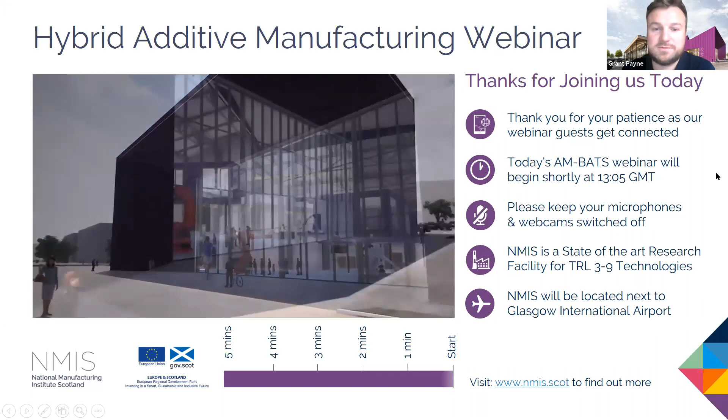We're running this one focusing on hybrid additive manufacturing. So we'll be finished up around about 3:15 Greenwich Mean Time today.

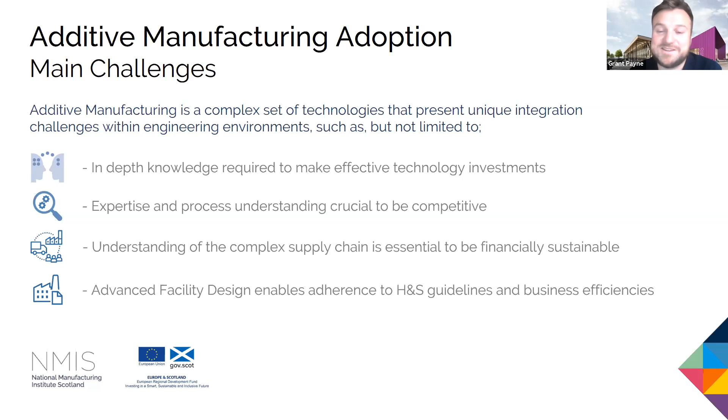We've been working in this area for a long time now, so we understand the complexity of the supply chain, and we'll be able to break this down and simplify it for you. Lastly, looking at the facility you would need to house additive manufacturing, the health and safety around this can be quite daunting. We've gone through it, we've got all our lessons learned, and hopefully we'll be able to transfer this across to you in a very efficient manner.

So essentially, what we're trying to get at is, if you do choose to work with us, you can adopt this whole work smarter, not harder approach. Essentially, let us do the heavy lifting for you, break down all the complexity, and give that to you in a way that's really going to show benefit to your business.

So there's 4 barriers to additive manufacturing that people always look at and think, can I achieve this, yes or no? These are around suitability, so which processes match the engineering challenge that you have in front of you.

Looking at variability, people often hear that additive manufacturing can give you variable results. We can work with you to help you control that to gain repeatable results - the reliability aspect of it.

So you've now got your variability issues sorted, but how can we make those parts that you've generated align to industry standards? And then lastly, scalability - understanding which technologies to invest in that will allow you to meet your current demand, but also looking ahead into the future to meet that projected demand as well.

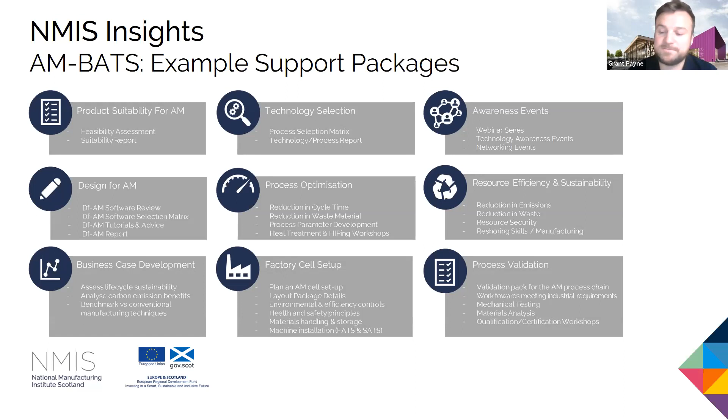So in terms of looking at how do I build a business case for additive manufacturing - if we look at that first step of looking at suitability, from the list I just showed you there, these would be some of the support packages that we would pull together to help you come to that business case: product suitability, design for additive manufacturing, and then process selection.

So that's at a support package level, but what does this look like as a step-by-step process? Well, we have a process for reviewing product suitability for additive manufacturing. There's a stage gate there where if at least one additive manufacturing process is deemed suitable, we can then move forward and ask you some more questions about what your engineering challenge is.

And then we can move on to a design for additive manufacturing process where we're looking at the shortlisted technologies and generating some concepts around them. And then we can feed this into a process selection matrix that takes your handful of concepts and then pulls out the best one suited to you and suited to the manufacturing challenge.

Then we can move to something people are more used to, a standard design for manufacture, where we've got one process, one design in mind, and move forward. That's all the different constituent components that then build up to giving you that rich and detailed business case to decide whether we should start making further investments and putting more effort into looking at additive manufacturing as a technology for your business.

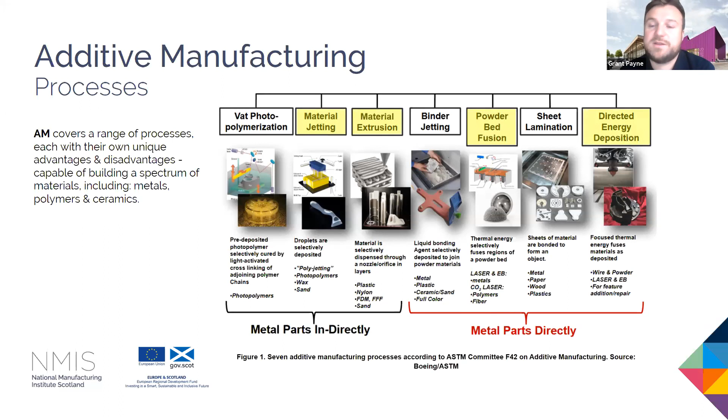So material jetting, material extrusion, powder bed fusion, and then we have an array of directed energy deposition technologies as well.

As I said, this is simply put as 7 different families, but when you actually start to look at it, this is where the complexity creeps in.

So for the purposes of today, we are looking at hybrid manufacturing using additive manufacturing, and more specifically machining as well as laser metal deposition in an open atmosphere. And the reason we detail it out to this level is it then provides a context of what you would be working with and the materials and the limitations of what you're doing.

Because we're working in an open atmosphere, that means we're restricted to non-reactive alloys - things like cobalt, nickel, or steel alloys. And what this means is we cannot process materials like titanium or aluminium alloys.

So looking at the capabilities in terms of additive manufacturing that we have at this moment in time at NMIS, we have a hybrid system ourselves, which you'll hear more about in this webinar today. We have metal powder bed fusion, and we have 2 wire arc processes - one is a plasma-based process, and the other is a gas metal arc-based process.

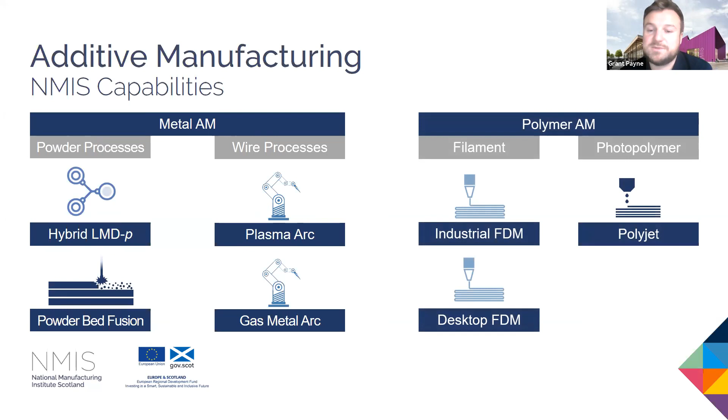And then looking at the polymers, we have industrial scale FDM and polyjetting, as well as some more desktop-based systems that you're possibly more used to seeing.

So if we look at what is hybrid additive manufacturing, or hybrid manufacturing, there's a lot of ambiguity out there. There are lots of different definitions that all say something slightly different. What we can do is look at those and pick out some really rich pieces of information within them. And what we can also do is rule certain things out. For instance, that quote on the bottom left was suggesting that using coolant while doing machining is a hybrid process. For us, this would be considered completely out of scope.

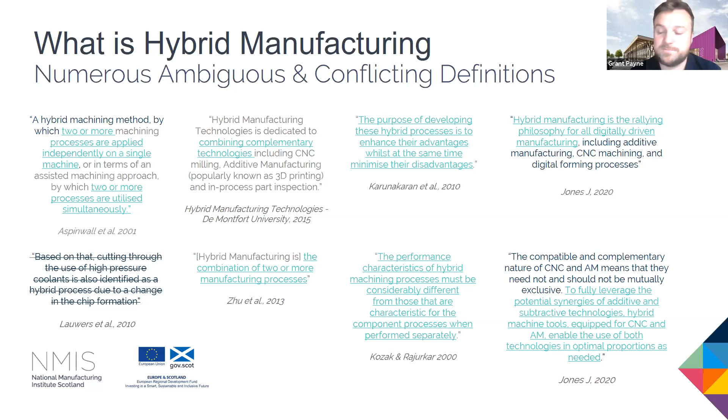What we would refer to as hybrid manufacturing is the following definition: using a single workstation, 2 or more processes, and lastly, integrated programming. When you bring all 3 of these elements together, this is what we would refer to as hybrid manufacturing. I won't talk through the details of this just now. I'd invite you to go back and have a look at this on YouTube and read through line by line in more detail what we mean by this.

But moving forward and looking more specifically at hybrid additive manufacturing, which we're talking about today, the definition we've been working towards is that it seamlessly integrates additive manufacturing and subtractive technologies on a single platform. The synergy of integrated programming allows for the harmonious interchange between processes throughout, enhancing their respective advantages and minimizing their disadvantages. But again, the previous rules apply, so it needs to be on this single workstation.

What do we mean by additive manufacturing? The ISO ASTM standard that I covered previously. Today specifically, we're looking at laser metal deposition, but there are other additive manufacturing processes that could be integrated to create a hybrid platform. And also subtractive manufacturing, so machining. These are the 2 that we've brought together on our platform and will be discussed by our industry partners today.

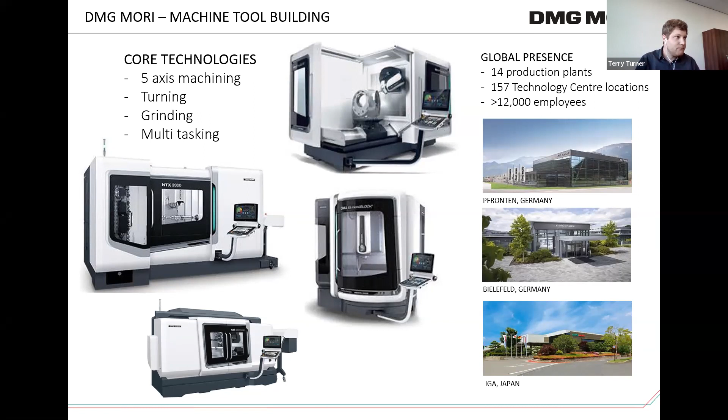So essentially, our core is that we are a machine tool company, but building on these core machine tool technologies, we now have a focus on 3 strategic future fields. They are automation of the machine tools that we sell, so we have an array of systems for our customers to also automate their workpiece or tool handling. The second is the digitization of the manufacturing process, driven mainly by our across-the-board control system that we now have called Celos. And the third strategic area for us is additive manufacturing.

Particularly on the additive manufacturing side, we're actually working across 2 technology types. These are both metal powder-based technologies, both using lasers to fuse material together, but very different to each other in terms of the way that they work. Both methods have their advantages, both have unique abilities to offer solutions to different manufacturing challenges. With selective laser melting here on the left, also known as powder bed fusion, we're building parts layer by layer within a cubic build volume, using 1 or 2 lasers.

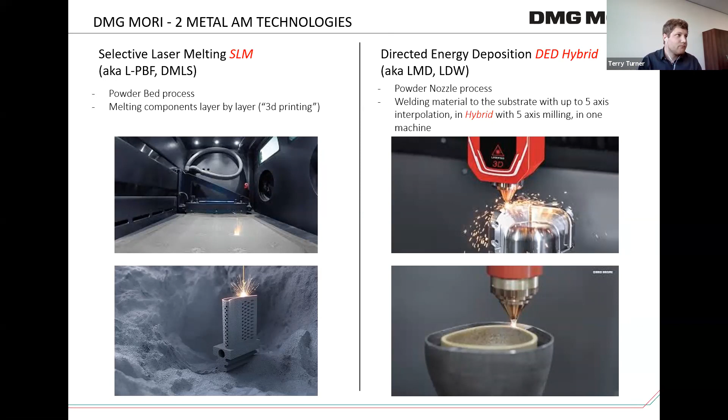So today's webinar focuses on hybrid manufacturing.

The image in the top right shows how we actually deposit material. We have a powder nozzle with a conical powder feed, conical powder flow through the nozzle, and then a central laser beam, which welds the powder material to the substrate under a shield of argon gas. So we're building parts as we interpolate the DED head around in the 5-axis machine in the same way that we would subtract material with milling tools.

And the machines can automatically and quickly alternate between adding with the building head and subtracting with conventional milling tools.

The machines are actually based on our monoblock range of milling machines that are produced in Pfronten in Germany. This combination of technologies is completely uncompromised in terms of the fact that we have a 5-axis machine tool that is very well established in the market. So all of that machining functionality - cutting tool management, on-machine measurement, cutting lubricant, and that experience we have in machining and in 5-axis motion control - all of this is still there and uncompromised on a hybrid machine, with the additional availability of a building head.

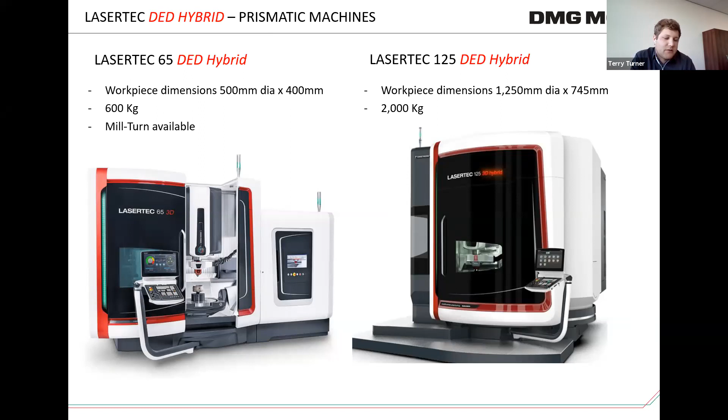So just now going on to applications of the hybrid technology and where the benefits of it really lie. Firstly, we can talk about what it gives us in the context of when we manufacture new or spare parts. One clear advantage is the fact that we're always building near-net shape features and parts. So whilst we still might finish machine surfaces, we're talking about an opportunity to cut costs on material stock itself, on cutting tool usage.

And to offer an alternative to sourcing of expensive and perhaps long lead time castings and forgings. We can also add features onto parts - we can start with a part and add something onto it. That gives us the chance to consolidate on what our base geometry might have to look like when we're manufacturing different variants. So what that means is that we don't have to have all of the material there. Where it makes sense to, we can add it on within the machine.

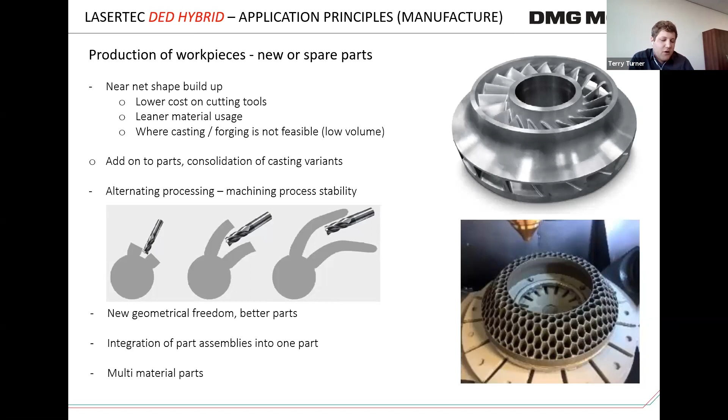For example, can we create internal cavities? Can we build honeycomb structures like you see here, or can we produce perhaps thinner walls than what we could previously?

The other clear application area that we find, and one that we've had a lot of success with, is repair. Whether that be with worn tooling components in casting and forming processes, or in high value end-use parts such as blisks, where there's an economical advantage to repair and reuse high value parts, this hybrid process offers a one-hit solution.

In general, we're working with the idea of machining away worn or damaged areas, perhaps using touch probes within the machine to identify the areas of repair. Then we're building them back up, and then we're machining them back to final geometry.

Here is an example of a repair application with a customer of ours in Germany. This is an automotive high pressure die casting tooling part, where previously it was quite an unrepeatable, unreliable manual welding process, followed by a conventional milling machine to finish.

What we now have is a controlled, one hit, digitally driven process with a time saving of 80%. The other advantage is that once we have this controlled and digitally driven method of repair, driven through CAD/CAM, it's then easily transferable to other parts and other geometries.

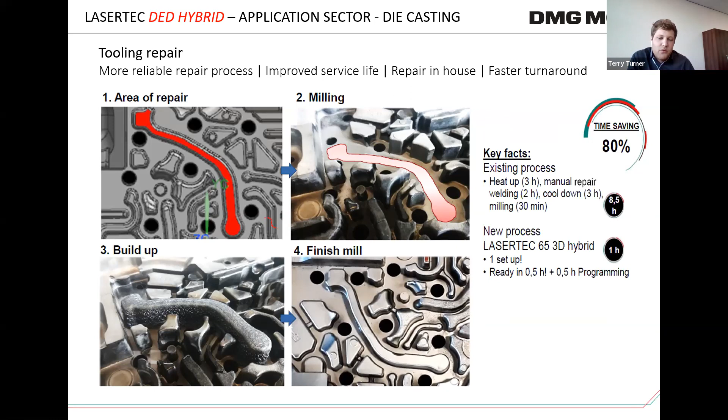So, functionally graded materials. Here's something that we're seeing more and more potential use for as we develop applications for the machines - the idea of dual material building of parts, or so-called functionally graded materials.

All of the machines that we offer have the ability to work with two material hoppers - two material feeds that can be controlled all from the CAM system and into the NC code, to locate two different materials in different areas of the part, or to transition from one material to another.

An example of this multi-material hybrid being used again in the die casting area, whereby we're fully building and machining a tooling insert in this example, but with a bronze core and with tool steel outer surfaces.

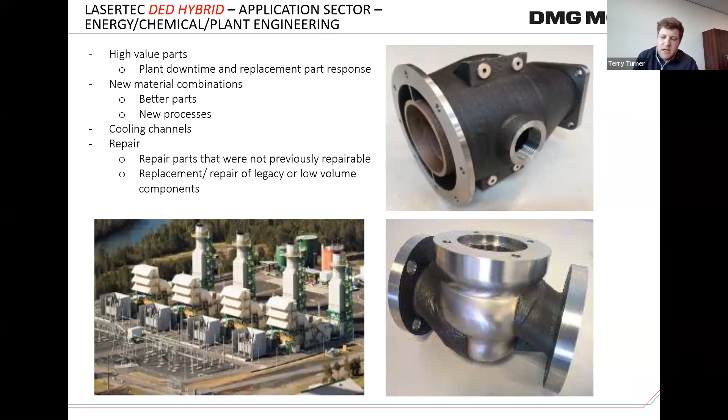In this example, we build up a 316 stainless steel body. We can then machine it, machine some coolant channels, and then changing the material, but going back to additive, we can add Inconel 718 cutting flutes. Then we can machine back that geometry before finally applying a tungsten carbide coating.

So this is all one machine, one hit, multi-material finished part. And interestingly, if we employed our ultrasonic grinding spindles within the machine, which would also be possible, we can then finish grind the tungsten carbide coating as well. So this is an example where we're not just additive on one machine, then subtractive on another, or bringing that into one machine. We're actually taking advantage of the fact that we can alternate between additive and subtractive throughout the process.

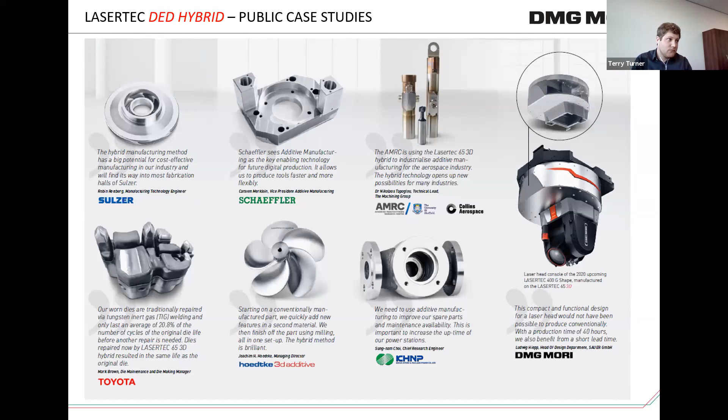So that concludes my presentation. I hope that was informative, and I'm happy to take any questions.

That was absolutely fantastic, Terry. Thanks for sharing that with us. I've actually had two private questions come across to me.

The first one is asking, can a hybrid machine still do finish machining to the same level as your standard machine offerings? Yeah, so the answer to that is absolutely yes. As I said before, the machines are based on the monoblock 5-axis machines, one of the more common 5-axis machines that we sell. So all of that 5-axis expertise is still there. The machine in that sense is as it is. We do have customers that will use the machine as a milling machine for 50% of the year, and then use the additive side of things when they need to, when they need to do a repair, or when it makes sense to use hybrid to manufacture parts.

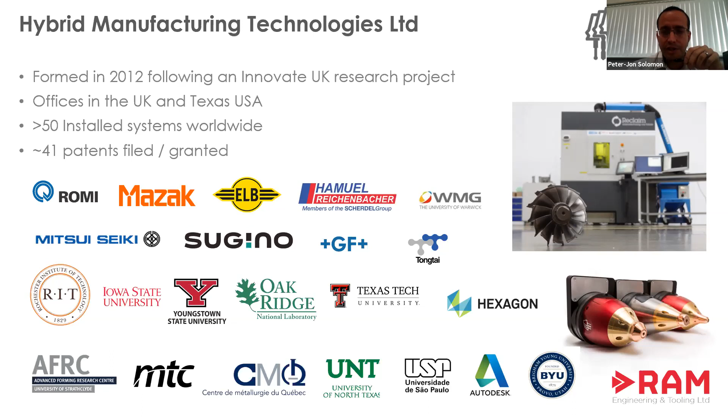A little bit about the company. It was founded fairly recently in 2012 off the back of an Innovate UK research project. We have offices in the UK and the US, and as you can see, there's about 50 systems installed worldwide. You can see a bunch of logos there from different customers, OEM partners we work with, and other research institutes that we have partnerships with.

Why do we want to do that? As I sort of already said, Terry's done a great job of saying why. So I don't want to rehash a lot of what he said, but I'll cover quickly some of the very similar sort of application areas. Why do we want to do it? Repair and remanufacture is one.

Oh, has that popped up? Are you just seeing my slide, or are you seeing some other images over it? It looks like we're seeing your full slide.

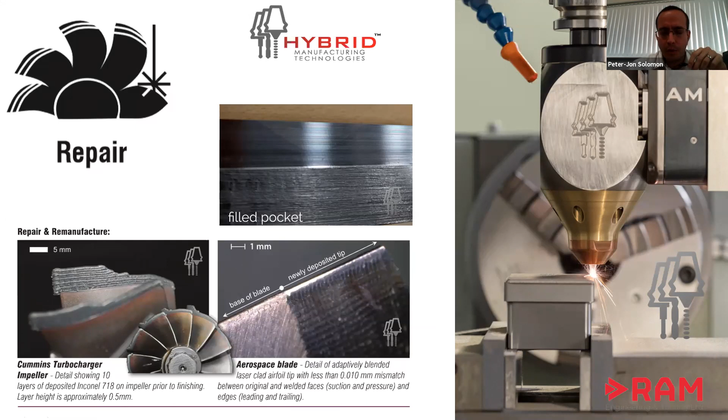So castings, components where there's maybe a defect or big problems, you can machine it out, put the material back in. On the right-hand side, you can see a tooling insert, and that could be from various types of tooling, whether it's stamping or injection molding or press tools or even forging. So adding material onto the split line. Again, this is an application area for why you want to bring LMD into a machine tool. This is an example. This is an end use customer.

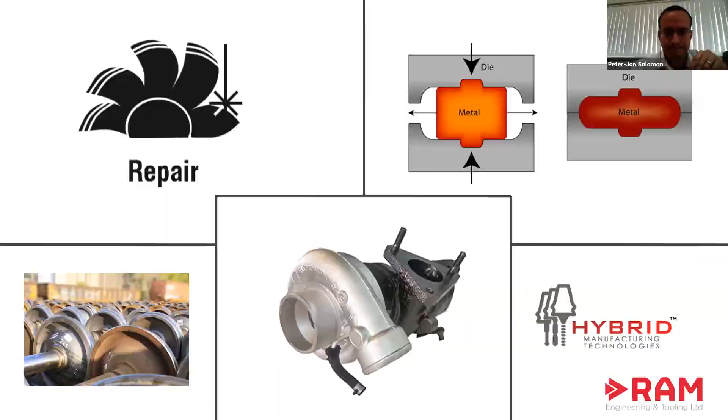Great, thank you for that, Ross. So here's another example of repair and remanufacture. You've got those components on the right, you can see. This is a comparison where we had a scenario where the parts have been modified, so there's a new revision. You have 12 parts in stock. What do you do? Do you throw them all away and discard them and make new parts, the latest revision? Or can you modify them and bring them up to scratch by adding material on?

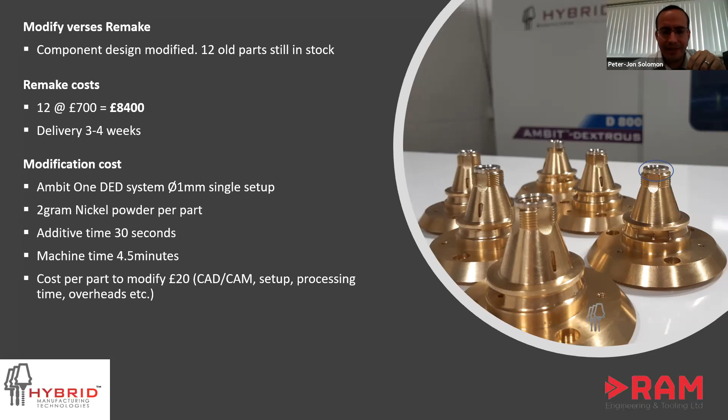If it's a metal-off case, well, it's easy, but in this case it was a metal-on. So the remake cost, if you're going to throw them away and make a whole new batch, that's roughly what you're looking at - about £700 a piece and 3 to 4 weeks. Or alternatively, you could modify them using hybrid. Using a 1mm laser spot, only about 2 grams of nickel, and a deposition time of 30 seconds plus 4.5 machining, you're really looking at about £20 per part. That's considering the CAD/CAM time, the setup, the processing time, and the overheads around that. So you can see basically you salvage some parts and save all that value you would have lost, and they're now up to spec into the latest revision. A great simple case study showing the potential savings in some applications.

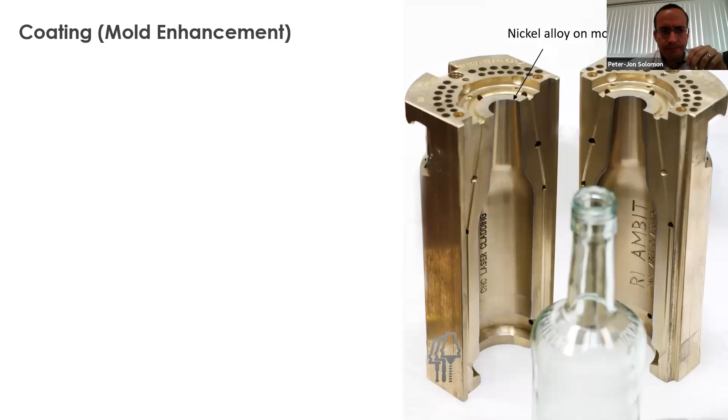Here's a real case study. This is an example again of an end use customer. If you look on the right, you can see the bottle mold. And very faintly, if you look on the split line, you can see a different material. That's a nickel alloy to give better hardness, corrosion, and heat resistance in the process.

So before they adopted hybrid manufacturing, the process looked like this. They would take a casting, put it in a machine tool, rough machine it, then take it out, heat it up to several hundred degrees, then put it in a robotic cell with a plasma transfer arc welding, add the nickel alloy into the split line, let the mold cool over several hours, then put it back in the machine and do the final machining. A lot of work in handling, a lot of work in progress, and longer processing times.

Going and adopting the hybrid process, they could take the rough casting, stick it straight in the machine, rough it out, prepare the edge for laser metal deposition, add the material onto the split line, and then finish it in a much shorter time, sort of less than an hour. So you can see the potential savings there in terms of lead time, process simplification, and improved quality by using laser deposition instead of the PTA.

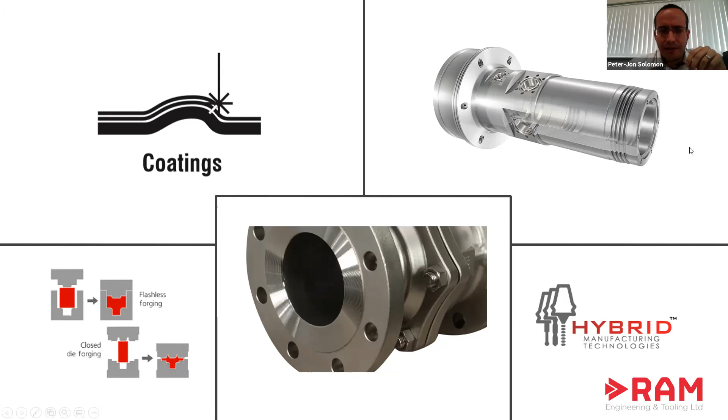And here's a few other parts which Ross sort of added, which I think you'd like to comment on. Yeah, very, very similar to the process of the mold enhancement. In the oil industry, obviously, I'm based up here, we see a lot of applications in this area.

Similar idea to the mold enhancement, where the guys are looking at the wear areas, but using the laser metal deposition and the accuracies of the CNC machines, we're in a position where it's not something new that they're doing, but they're altering the idea of what they have done in the past—they can aim the material at the exact right area and put on potentially less material to do a similar job. So at this stage, we're talking about coating a part and making its life longer.

Again, similar with forged tools as well. There's a master tubing hanger shown in the top right there. These lend themselves to this application pretty well, especially as we can take these back from service and then go into the repair, or remanufacture-style additive option as well. So by rights, you're designing the process in at the start, and you're also allowing yourself the repair towards the end of its life.

Marvelous, thank you very much.

So we spoke about repair, remanufacture, coating, and now adding features. And adding features, you can also kind of put in that section as growing parts. And with the nature of hybrid, you're always adding something onto something, so your substrate can become part of the part.

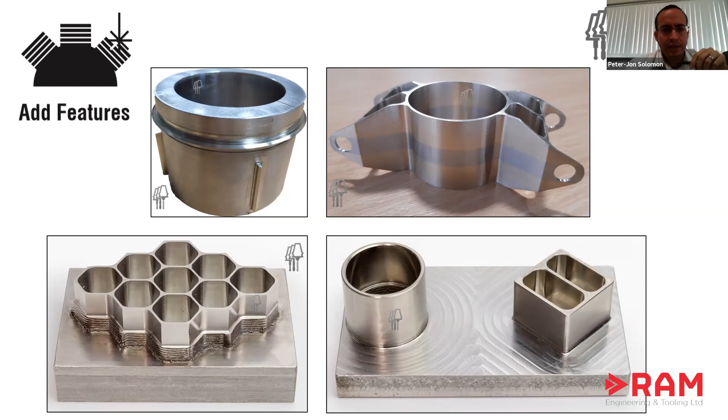So you've saved on material, you've saved on time, but the other thing importantly about adding features is you can add a performance enhancing material. So whether it's for hardness, toughness, corrosion resistance, or wear, you can actually add something which gives you the properties you want in a particular area.

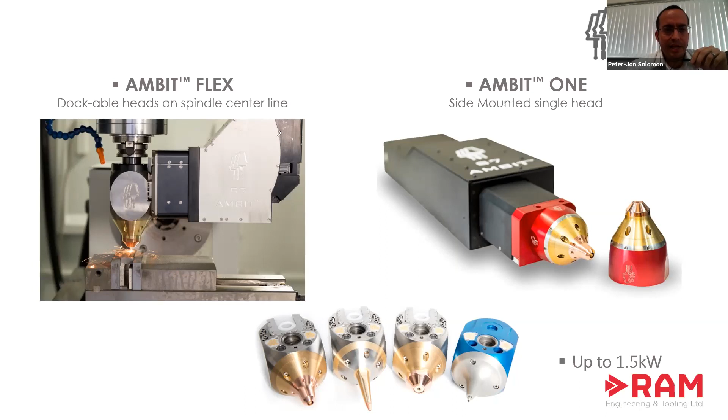On the right side, you've got the Ambit One. This is not spindle center line; it's typically mounted onto the side of the spindle, but typically one nozzle, much simpler. You don't necessarily get all the flexibility you get with the Flex system.

And that's just an example of the sort of heads you can get on the Flex system. You can see physically the different nozzles, and they have different laser spots. And even the one second from the left - we call that a 4-port nozzle - it's a different type of powder flow for different applications.

You also get the Ambit Multi, because you can have multiple heads with multiple technologies, and it can go on multiple platforms - robots, gantries, machine tools. Importantly, this one is really for multiple kilowatts, so you're going 3, 4, 5 kilowatt range, higher rate deposition, but you still get all the flexibility. This one is not mounted on the spindle center line; it'll again be on the side of the spindle.

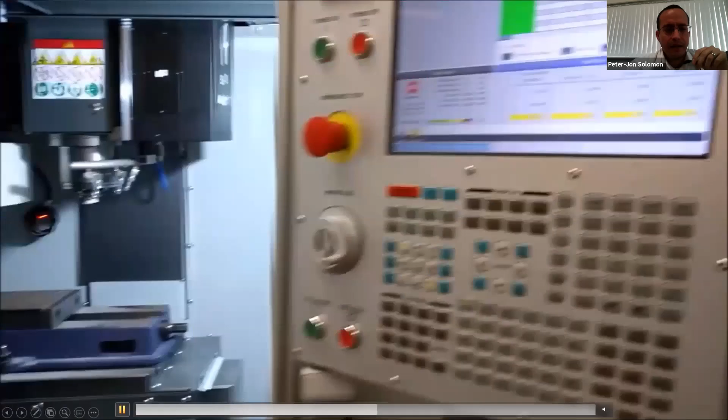That's an example of the multi-system on a robot. That's an example on a gantry. And here's a little video showing the multi in a machine tool. If you managed to catch that, I'll show it again - let me pause it. There we go. So you can see the head comes down, does your additive, and when it's finished the head gets put away.

Moving away from metals for one moment, if you have a different requirement, you also have the head that does polymer extrusion. This is, I think, several orders of magnitude faster than normal FDM 3D printing, where you can go up to around 10 kilograms an hour of polymer extruded. On the right side you can see it in a robot, and on the left side it's in a normal machine tool. You can process normal pellets that you would use for injection molding - materials like ABS, carbon fiber nylon, fiberglass nylon, and the list goes on.

Importantly, why would you want to put polymer extrusion in a machine tool? Well, one potential application is replacing structural parts which conventionally would have been made from aluminium, because this is high strength printing with the polymers you can add. So it opens up some really interesting applications for fixturing, work holding, and other structural parts that you might have used aluminium for.

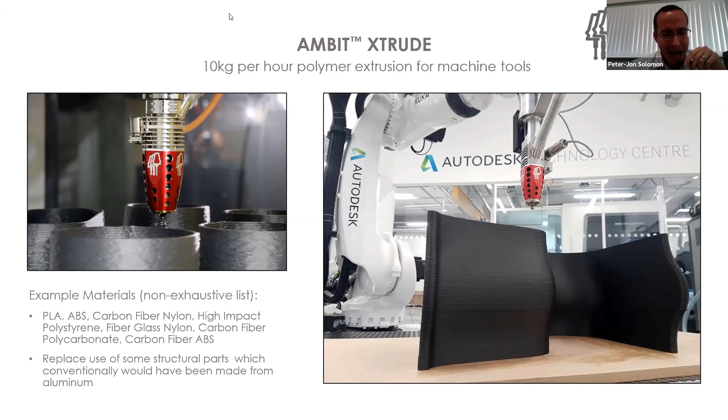So we've sort of covered the why. We looked at some of the hardware and the products of the how. The next part of the puzzle is, well, how are we controlling this all?

This is what we call our Ambit Core. This is the control unit, which houses the ancillary equipment that sits next to the machine. Inside this, you'll have your laser, your chillers, fume extraction, your powder hoppers, everything you need for the process. And this unit also controls the process and then interfaces and communicates with the machine.

Here you can see the HMI, the dashboard, which displays the parameters being used in the process, what's happening in the process, and all your parameters and stuff can be set and stored in here. So you've got the hardware, which goes in the machine tool, and the Ambit Core then controls it.

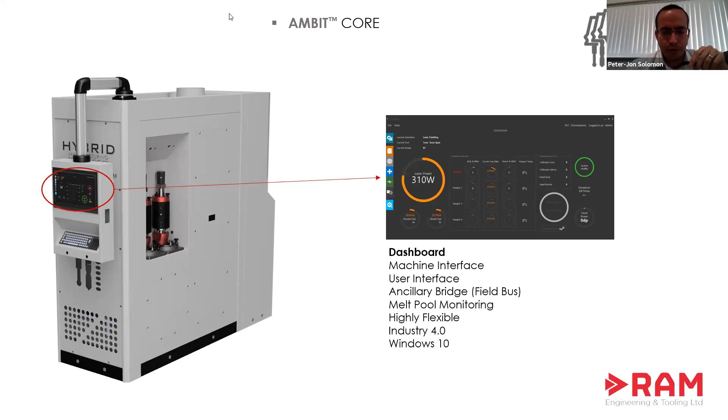The next piece of the puzzle is, well, how do we drive it? This is just an example of some of the CAD/CAM providers offering DED or laser metal deposition modules inside their software. You've got EdgeCam from Hexagon, you have PowerMill from Autodesk, and you have Esprit as well. You also have others I haven't mentioned, like Siemens NX.

I know even Fusion's starting to bring some of the DED toolpaths into there. So this gives you a maturity, really, where you have the CAD/CAM tools there to drive it. We've got the hardware we can bring into the machine tools, and we've got the control to control the process.

We've got the CAD/CAM, as we've just seen. We've got the hardware where we can print and add the material in the machine tool. We've got the machine so we can finish it. And we've also, importantly, the ability to inspect, because you are building something, you're adding material, so you want to check what you've added is fit for purpose. Some applications may not need it, but some will, and you need to have that inspection.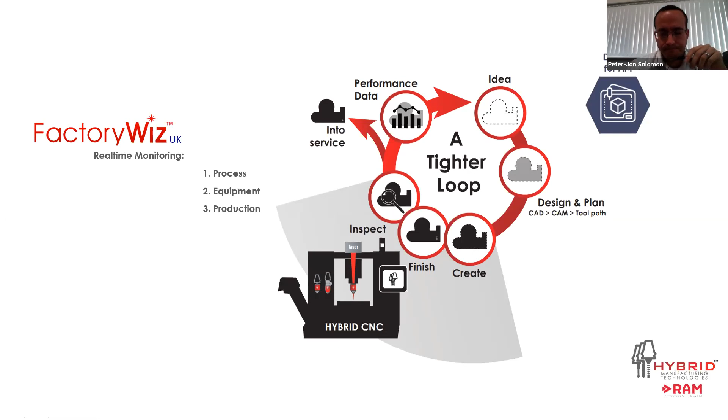Just to give you an example of the practicalities - okay, you have something you need to make in a hybrid machine. What are some of the basic steps?

The first step is to establish a bit of a process window, establish a good set of parameters. This is very similar to selecting a milling cutter. You're going to choose, right, I've got a 10 mil milling cutter or a 6 mil milling cutter, and this is suitable for your part.

So you will use some parameters, test them out to create a bead that might be 2 mil wide and a millimeter high. You need to know what those parameters produce so you can feed them into your CAD/CAM. Just the same as when you're going to do a milling path, you need to say, okay, this is a 10 mil cutter, and my step over is going to be this much, and this is my cut depth.

Just the same, you need to have a set of parameters which produce something that you then feed into the CAD/CAM. That's the first step in the process. The next step is, okay, you've got your part you want to make, and now you've got to look at designing a preform and your additive toolpath planning.

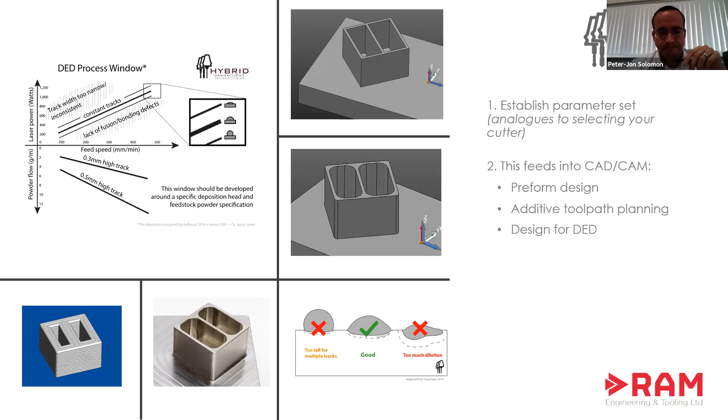Right, and I think I'll hand over to Ross for this slide.

Thanks again, PJ. So out in the field, what we've noticed over the past few months and even the past couple of years, to be honest, is there's a bit of reluctance to adopt this type of technology. There seems to be a tendency to go with what you know - we know how to subtractive manufacture. So a lot of what we're doing at the moment is trying to get rid of that reluctance that's there.

And this next slide, as we take you through it, will show what we've done, what we've set up, what we've arranged to make sure there's a continuous loop there. So basically, when we talk to customers, we've got a succinct set of questions for information gathering so we can come back with a faster, more informed assessment of what you're trying to do and whether the technology actually lends itself to that. So obviously working with hybrid, working with AMBATS and AMBATS process, we can qualify the work scope and give the advice back.

If we move on from there to the quotation stage, we can obviously provide that. We can provide the equipment recommendation also. The good thing about hybrid manufacturing technologies is obviously you can buy a new machine and we can fit it to it, you can fit it to used machinery, or you can go with existing machinery within your own facility. Some cases, people are not even looking for the hybrid side of things, i.e. additive and subtractive.

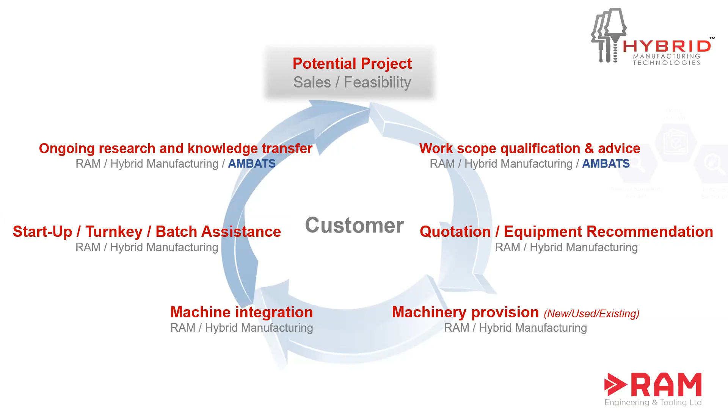Great, thank you very much.

As Ross alluded to, the next few slides I'll go through fairly quickly, but it shows how do we bring these products into machine tools? One option is retrofit - retrofitting existing machine tools, any one of those products, the Ambit Flex, One, Multi, can all go into an existing machine. Then we provide the laser safeguarding, operator training, applications, and so forth. Big question is, why would you want to retrofit?

First main point, it's more cost effective, and it really does improve the business case for many more applications. When you think of the cost to work on a part or some applications, if you factor in how much that machine is going to cost to run you an hour, but you've got an existing machine you've added technology onto, all of a sudden there's many more applications you can start applying this technology to, and it really starts to make sense.

The other one is you can use the platform that suits the part or family of parts, so you don't have a bit of a compromise. You might have a certain range of parts - put the technology on that machine that you really need, that suits maybe the accuracy or the type of part.

Another one, a smaller one, is existing users will be comfortable with machines, and also the hardware could be moved to another machine. So maybe initially you want to put it on an older existing machine, test it out, be comfortable and happy with the process, and then you can say okay, let's move it to a new machine. And this is the retrofit option.

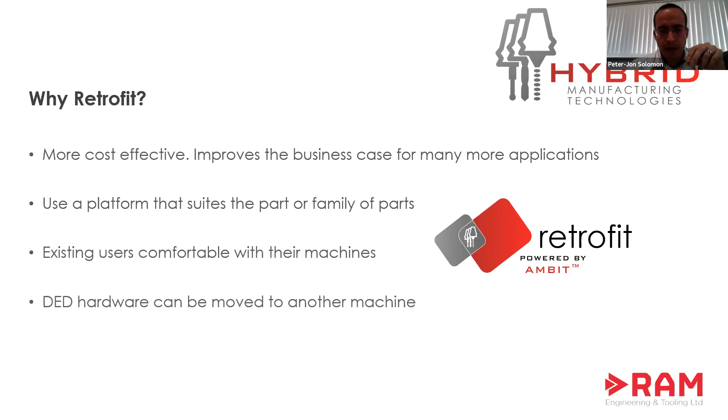The next option is delivered, and delivered is again adding one of those product offerings onto a new machine at HMT's facility, and then doing all the guarding, getting everything sorted, and then sending the machine as new to the customer. The other option is OEM.

As Ross already mentioned, we spoke about advanced manufacture. This is really to support people, to see the market, help people really to see real parts being made on real machines. Also for people to be able to come and get training, or while they're waiting for a machine, their parts can get made. But perhaps some people don't want to ever bring the process in-house and are happy for someone to take care of that for them. So this is another key part of the service that's on offer.

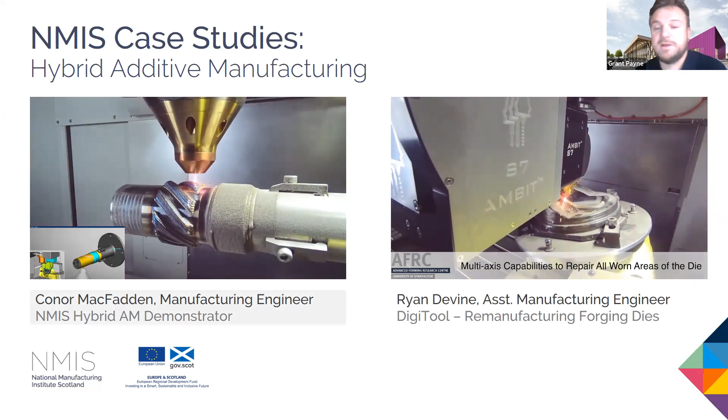We're now going to move on to 2 case studies that were undertaken at NMIS. First up, we have Conor MacFadden, one of our manufacturing engineers. He has developed a hybrid demonstrator that he's going to talk through, and then we'll be followed on with Ryan Devine, one of the assistant manufacturing engineers in our team, and he is presenting a case study looking at remanufacturing forging dies. So Connor, I'm just going to hand over to you just now.

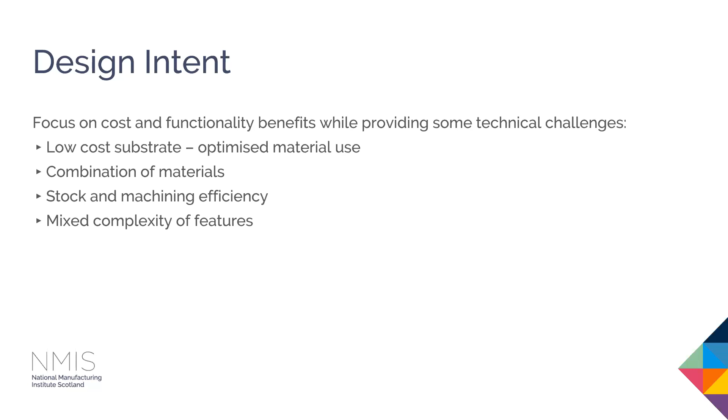So what did we end up with? We started off with some off-the-shelf 2-inch mild steel tube stock, so about as cheap a substrate as you can get. For the additive features, we used Metcoclad 21. That's a cobalt alloy, which has good impact and wear resistance. We've had some experience with this material before, as you'll see from my colleague Ryan's presentation when we get onto that. So we figured it was a good place to start, because we already had a pretty good parameter set for doing cladding with.

We settled on 4 features with different levels of complexity. They are a bearing face, which is the rightmost feature on it, so basically it's a small increase in diameter. A set of helical splines, and so these would be a sort of interlocking drive feature. We have a cam, which requires an offset buildup and would require a large billet. And then finally, we have a flange on the end.

So for the manufacturing sequence, it's 4 distinct separate features, and we worked through them one by one. We deposited, then machined, then deposited, then machined, and so on through each feature. The benefit of doing it this way is we started simple and increased the complexity as we moved along, letting us take the learning from each feature and apply it to the next features as we progress.

Moving on to programming, we have a design for a component, and we now need to figure out how we actually make that component. So we used Siemens NX for all the operations in this project. We're a member at Mbas, so we have access to their software.

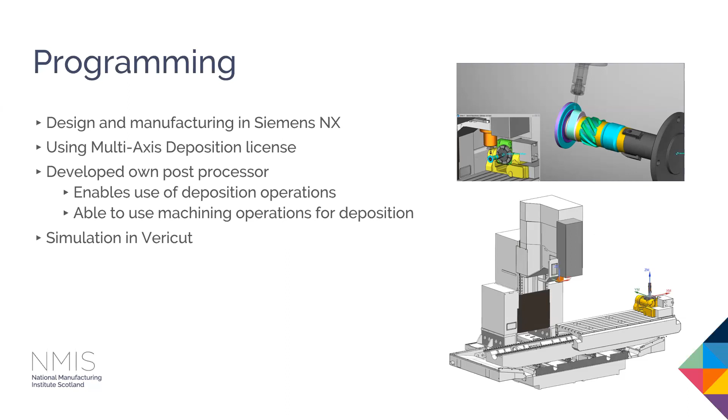So the first feature is the most simple one. It's basically a cladding operation, which you might have seen before - it's a fairly common application of this type of technology. We built this feature in 2 layers using a spiral pattern, so it's just a continuous helix that works its way along, steps up and then comes back. Only 2 layers were required to get the thickness that we need.

We actually found that it built a lot more than we had initially expected. So I think we initially had 3 layers and we cut it down to 2.

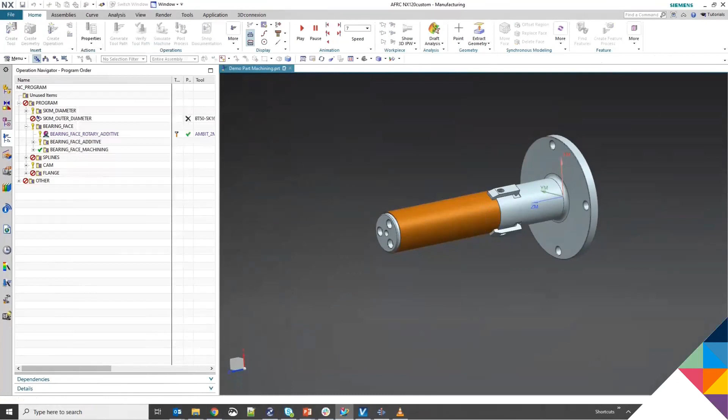So here you can see how the operations were programmed in NX. If you've used it before, you can probably see that if you know how to use NX for milling, the additive operations are exactly the same kind of layout and structure - very easy to pick up if you're familiar with the software. You also get the benefit of being able to visualize the component and the tool together within the CAM software, so you can see everything all together.

Once you have your part programmed in NX and you've output your NC code, we then put it through Vericut just to make sure everything is correct. I'll get onto that in just a second.

So you can see the deposition - Vericut is showing you exactly where the material is coming out and adding on. And then when you machine it, you'll see where you have material left, so it is simulating the subtraction of the deposited material. It colors in each face so you can see exactly what's happening with each tool and quickly track back through your part to see what features have been produced by what tools.

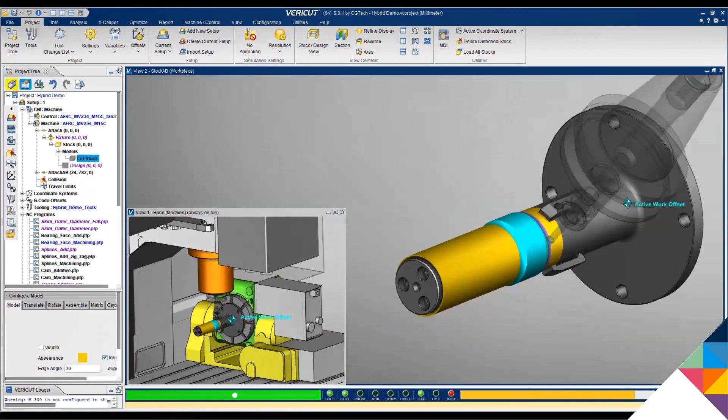And finally, we have the end result of that operation - a fairly simple feature. Stepping over to the next one, we have a slightly more complex feature in helical splines. We have 8 splines around the part, intended to be an example of a sort of hard-wearing drive interface feature.

We could have built these the same way we did the cladding, just built a large diameter and machined it all the way. But that would defeat the purpose of using hybrid. We wanted to go near net, so we built all the splines individually.

We use 3 layers with a zigzag strategy, just 3 layers to build up the height, and you'll see the zigzag when I get onto the video of it. We lay down each layer diametrically opposed, so we did layer 1 on one side of the part, then layer 1 of spline 5 on the other side of the part. That allows us to spread the heat throughout the component.

Finally, when we machined it, we did cut into the substrate just a little bit to tidy it up and make sure we had clearance. It shows that if you've got your hardwearing feature, your hardwearing material for the main feature, you can just use a cheap substrate for your clearance area.

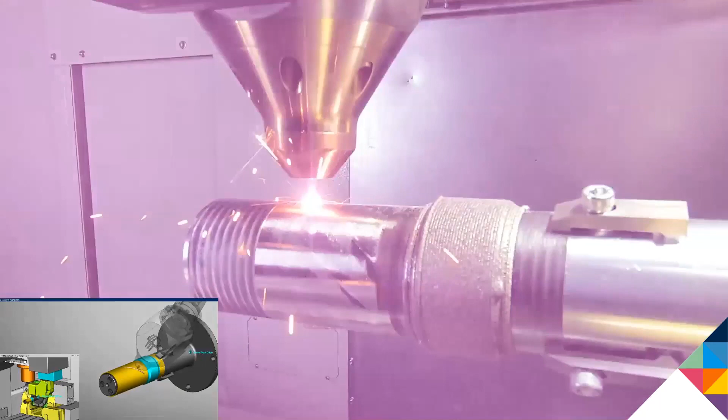So again, we always run through Vericut before we put it on the machine, just to make sure we're not going to have any expensive crashes.

You can see the zigzag pattern here, it's moving, the laser activates and moves back and forth. You can also see a small blob that appeared at the start. This was because of an auto clamp function on the rotary axes, and this is typical of the kind of thing you might need to think about when integrating these systems and programming them.

We've since managed to switch off that auto clamp function, but to get around it for this operation, we staggered the start point. It goes back to what was said previously about the cam - you need to think about your strategy and how you're going to build each component.

The total deposition time for this was only about 12 minutes, so it's quite time effective compared to if you were trying to machine it from a solid part.

The next feature we have is a cam. We have a 1 millimeter increase on the tube section all the way around the diameter. We then build a 9.8 millimeter high cam lobe on one side of it. If you were to do this just from bar stock, you would need a 70 millimeter bar or larger to start turning that down and then milling to finish it off.

The initial diameter increase was done exactly the same way the cladding was done, just a simple 2-layer spiral to build up. We then built up on one side with a zigzag pattern, similar to what we did with the spline. The difference this time was we used an alternating zigzag, so we changed the direction each time on each layer.

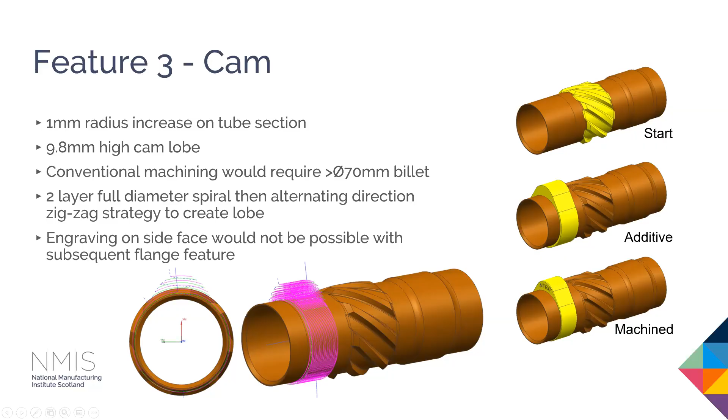So you can see some footage of that spiral buildup initially, followed by the zigzag. Each layer on the zigzag, we switch between depositing radially around the part - that's what you can see it doing now - and moving axially along the length of the part.

What we found is if you stick to a single direction during your buildup, you can get a bit of a fall away at the edges. But we've also found that you get a slight lump at the start and end of some of the longer toolpaths. So by combining those with the axial and radial alternation, you end up getting quite a clean vertical wall. You can see that pattern as it builds up on the video.

So that was quite a few layers to build up this feature. It was an interesting program, and it gave a pretty good result, which you will see in just a minute.

In these pictures, you can see that zigzag pattern with the radial and axial deposition, and you can see the resulting machined components. From the machine, you can see that it has all bonded together nicely and formed a nice solid material.

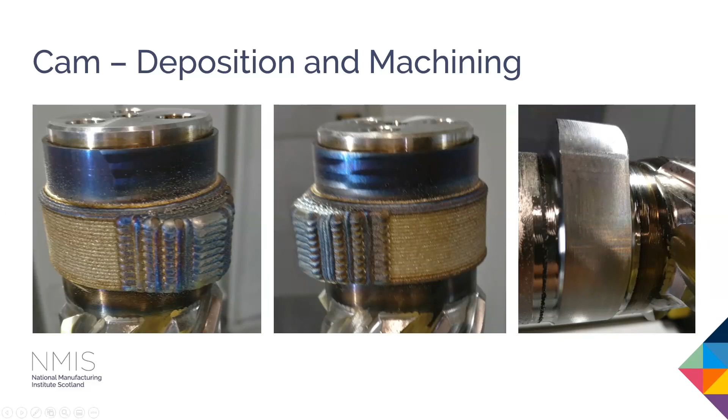So onto the final feature of this demonstrator component. We wanted to build a flange. Now this is the kind of thing you would expect probably to have welded on as a plate. But if you were to turn it from bar stock, you would need to start with a 90mm bar and spend quite a long time turning it down.

This challenge was particularly difficult because it's such a high feature compared to its width—20mm tall and only 8mm wide. That meant there was quite a long build-up. We also had to tilt the part a little bit because the cam had built so high that we needed clearance so we didn't crash into it with the deposition head.

The first time we tried to run it, we tried it just as a single continuous path, building the full 20mm, which ran for quite some time and didn't turn out very well at all. It came out quite conical. So we had to reassess our strategy and decided to build in stages instead.

To overcome that initial 5-degree tilt, we started off by building 3mm tall to get a bit of clearance. We then came along to skim the top of that, built up the next section which was 7.7mm tall, machined it back again to skim a flat face, and deposited the final layer up to finished height.

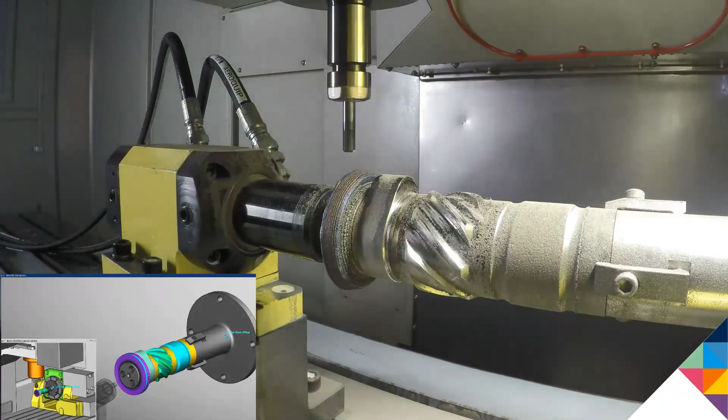So now we're coming in for the second build up. This one built quite nicely—we corrected our flow rate and got everything running perfectly. Now we come in with a milling cutter and skim that back to make sure we've got a clean face to deposit on. Finally, we come in with the deposition head again and build up the remaining bulk of the diameter.

You can see in this that it's still forming a sort of conical shape. We believe that's an issue with the step up on the tool as it steps between the layers, using a helical wraparound. This is something we intend to address on follow-up projects, developing our strategies further to build more complex features.

And here we have the finished part. It's not quite perfect—we still have a little bit of learning to do, but most of the features have been fully realized. We've identified that we need to refine the strategy for some of the larger features that build taller, and we have a follow-on project looking at thin wall features and taller features. We also want to apply this to forged components, leading on from research done by the Forming Research Center where we work. With that, I'm now going to hand you over to my colleague Ryan, who can show you more applications on this system.

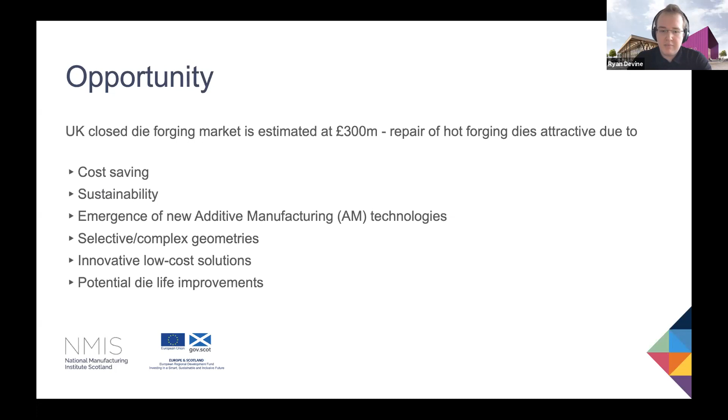Part of the project involved the AFRC gaining in-house additive manufacturing capability suitable for working on these hot forging dies. As part of this, we had to source suppliers for the retrofit, but also source a user of forging dies that we could work with collaboratively.

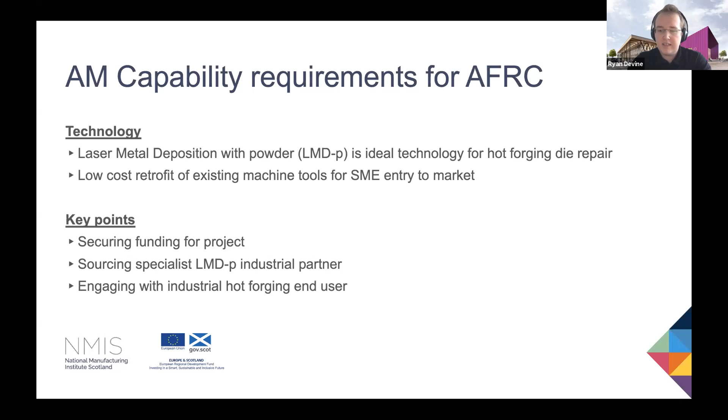We identified that the capability most suited for us was laser metal deposition, and we were then looking to secure funding, while working with industrial partners on the project. The project was funded by Innovate UK, and we partnered with Hybrid Manufacturing Technologies, getting the LMD Ambit system installed at the AFRC.

We also worked with Mills Forging Limited of Coventry, England. They are a manufacturing company who work with hot forging dies, as that's their main use. The project also involved different partners who provided different services in their own areas of expertise.

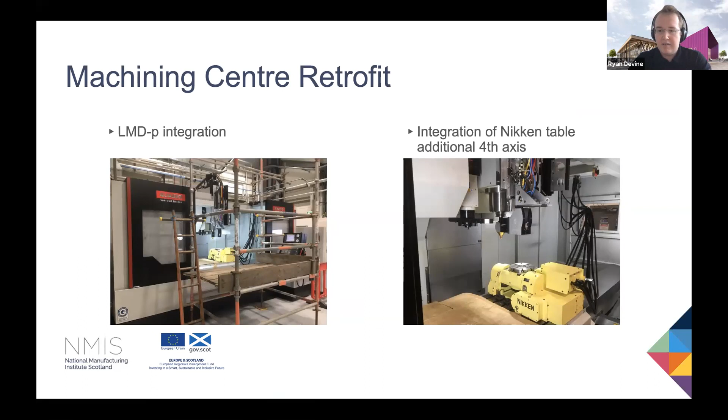At this time, we also installed the Nikken fourth axis table to give us more flexibility in the angles and access to areas, by having this additional movement in the machine. This was then the machine fully completed in the AFRC, ready to progress with the project.

One of the other critical aspects of the project was finding a material which satisfied all the criteria set out by our end user and what would be best for them. We created an initial metric that would allow us to screen through a large amount of materials and narrow it down to some key ones to look at further.

We looked at the initial forging requirements, mechanical properties, performance, processability, and other economic factors which might be important. We initially came down to a large range of materials, including mainly cobalt-based alloys, different steels, and some nickel-based alloys as well.

We would then take this list and evaluate some of the critical areas in more detail, primarily the mechanical shock properties, thermal expansion compatibility, as well as other wear characteristics, so that we could score every material and work out which would be most suited for the customer's die.

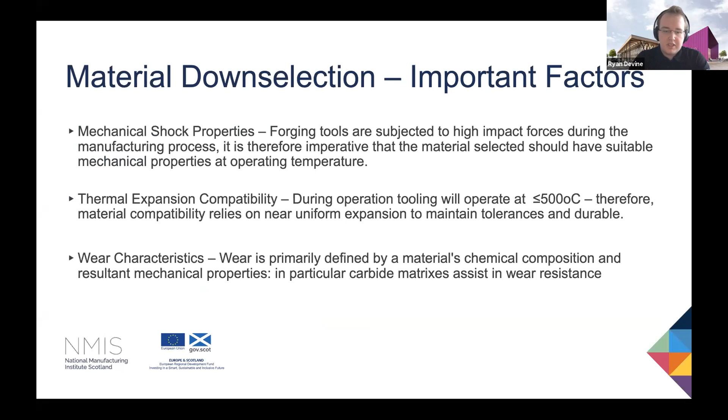We constructed another larger metric, looking at more of these factors and assigning scoring to different materials. This would then allow us to work out which one would be the best.

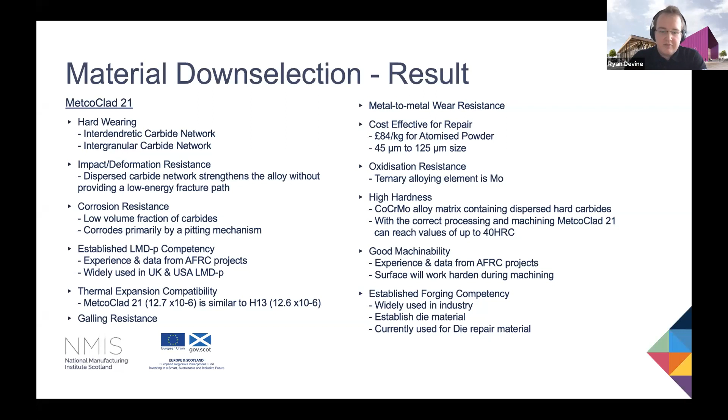For developing our actual remanufacturing strategy, we had to consider quite a few factors, primarily that the die itself was made from H13 tool steel, and we were going to be depositing MetcoClad 21 powder.

We were also looking to achieve a deposition bead with a height-to-width ratio of about 2 to 1, and we then had to look at the deposition pattern or strategy for how we laid it down. We had two options: either a crosshatch strategy, where each layer is rotated by 90 degrees as you build up, or a linear strategy, where each built-up layer remains aligned with the previous layer.

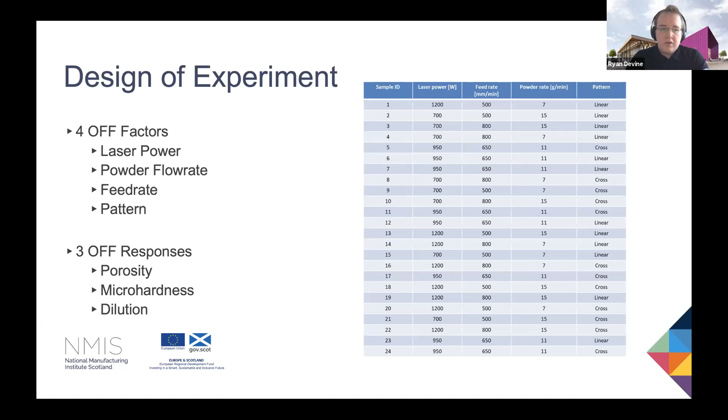To analyze what sort of strategies and settings would be best, we constructed a design of experiment with 4 factors, these being laser power, powder flow rate, pattern, and feed rate, otherwise known as laser scan rate. We also had 3 responses identified: porosity, microhardness, and dilution. So we carried out this wide range of experiments and a subsequent analysis on the samples produced in order to see which ones would satisfy all our requirements.

From this, we saw that experimental run number 14 was the highest performing sample. It gave minimal porosity, which was ideal, and minimal cracking as well. It also maintained roughly this 2 to 1 ratio that we were aiming for. So this laid out the parameter set that we should be using when it comes to actually working on the final die.

So just to summarize this, the recipe that was produced for our LMD parameters involved using MetcoClad 21 powder deposited at a rate of about 7 grams per minute. The laser spot size was 2 millimeters, and the laser power was 1200 watts. The feed rate or scan rate was 800 millimeters per minute.

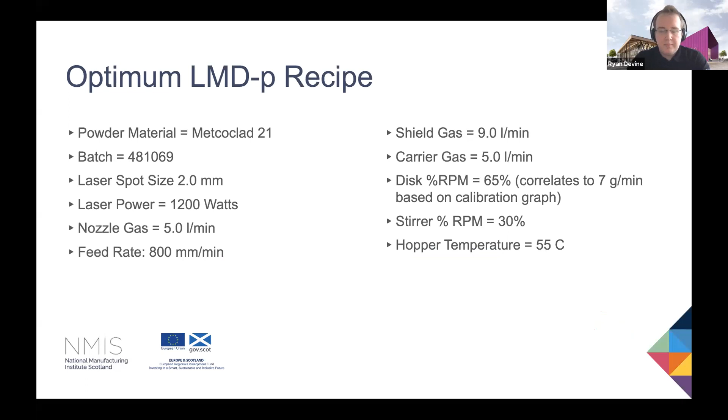So the dies themselves are used by Mills Forging to produce parts for forestry vehicles, and this is done in their 1,000-ton hydraulic press out of a billet boron steel alloy. What they would typically expect to see is about 1,300 parts as a maximum produced in their normal production conditions. So this essentially set the baseline target for our remanufactured die to meet, and this was our aim throughout the process.

So working with Mills Forging on this, we identified the four main areas that were the most problematic for wear. These areas were wearing more than many other parts of the dies, and these were the parts deemed most responsible for failed components.

And for all these sections, the same 3-stage hybrid additive manufacturing process was required in order to get it back to a sort of as-new condition. We would machine away the worn areas, selectively add material at these points, and then machine that back to the final geometry, ensuring it is within the original manufacturing tolerance.

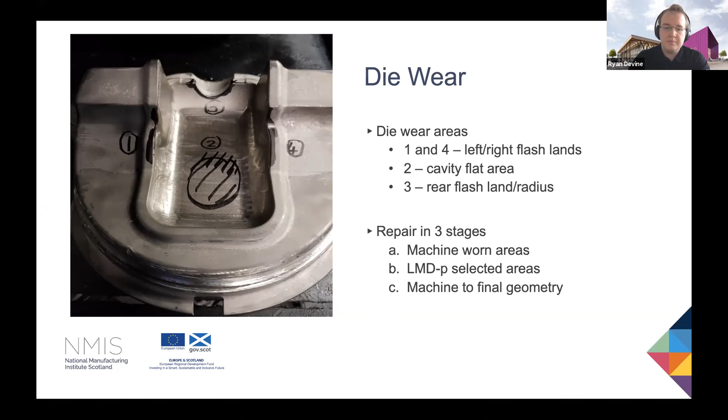Other factors we had to consider included integrating a CAD/CAM system. At this point, we went with Siemens NX, with milling and additive licenses for this. We also had to ensure we sourced appropriate tooling for the cutting of H13 and MetcoClad 21, and get the feeds and speeds for cutting of these materials set up as well.

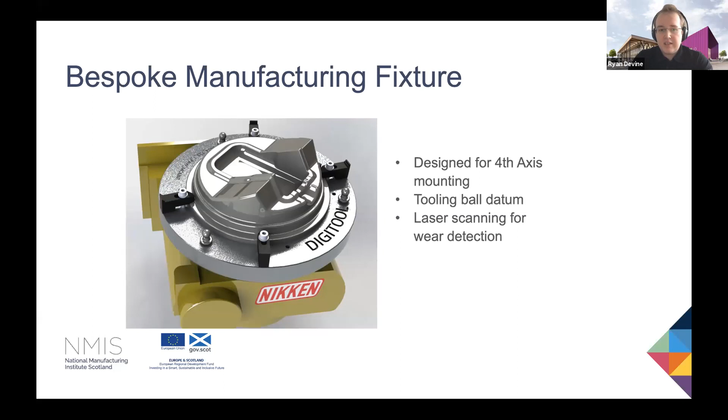These tooling ball datums were used for aligning laser scanning, which would allow for adaptive wear detection on the key areas. From this, we identified that for flashlands 1 and 4, we had to machine to about 1.5 millimeters deep in order to remove any worn and damaged areas from the surface. Similarly at flashland 3, we also had to machine to about 1.5 millimeters deep. However, for the cavity in section 2, that only had to be machined to about 0.5 millimeters deep.

So looking at the reconstruction of the die, the deposition part with LMD, for Flashlands 1 and 4, they were essentially mirror images of each other, 3 layers at about 0.7 millimeters high each. We had a 1.2 millimeter step over between paths, and also a 1 millimeter path overhang. This was just to ensure we built up sufficient material that could then be cut back to a nice final geometry within all required tolerances.

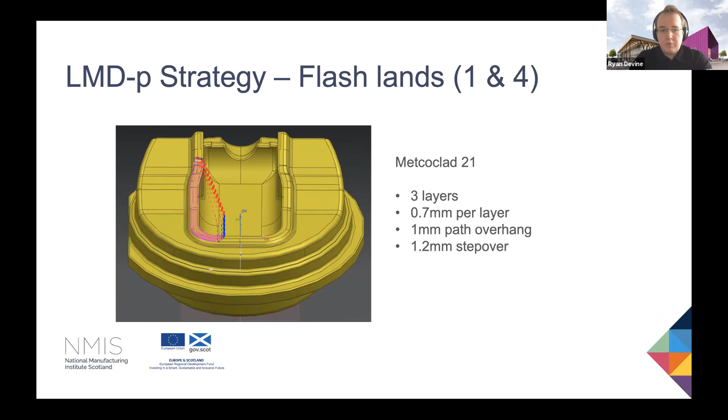Flashland 3, however, had quite complex geometry in that area. It was quite difficult to access as well, so it required a bit of a unique solution for tackling it. We split it into 2 stages, mirrored left and right on each side of the radius.

For the cavity flat area, we only required 2 layers because it was a shallower cutout initially, with the same layer height, overhang, and step over. However, this area also still had some technical challenges, as we had to ensure a really smooth transition between the H13 die and the MetcoClad 21 areas.

The way we achieved this was by doing our initial deposit, then machining that flat and running an additional bead around the outside of the area. This essentially created a sort of picture frame effect. We would then machine this flat again, which gave a much smoother transition and blend between the 2 materials.

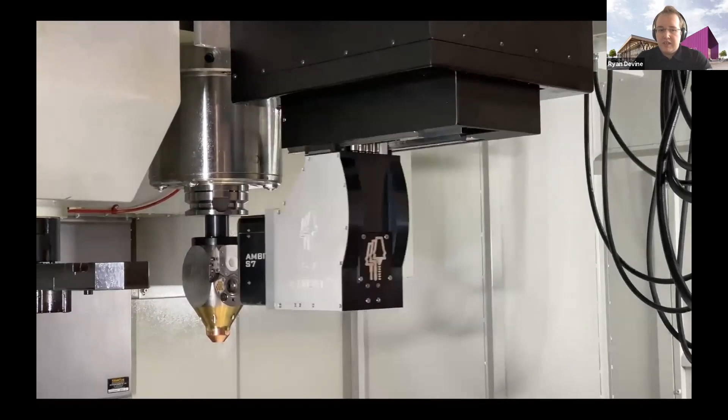I'll now show you a short video of the repair in action. This is after any initial machining. We are going to the docking stage, and now depositing material in area 3, the flashland at the back, working on the inclined section.

Then after having done one side, we rotate it round to do the mirror image of it as part of our strategy here.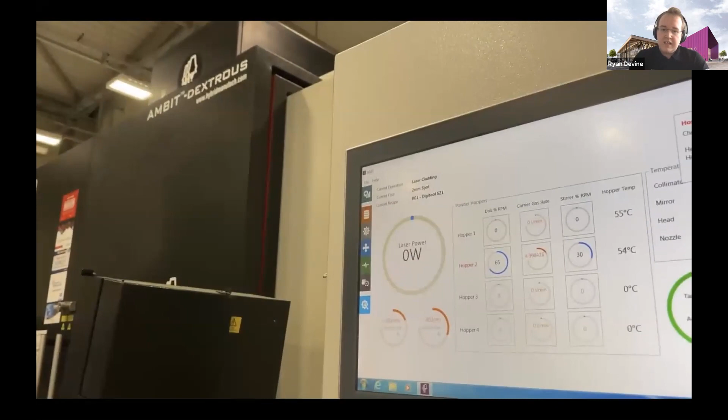One other thing we have during the process is the live data readout on the controller, which lets us monitor many factors about the machine and ensure we have full control over the process. We're now moving on to the repair on flash land 1.

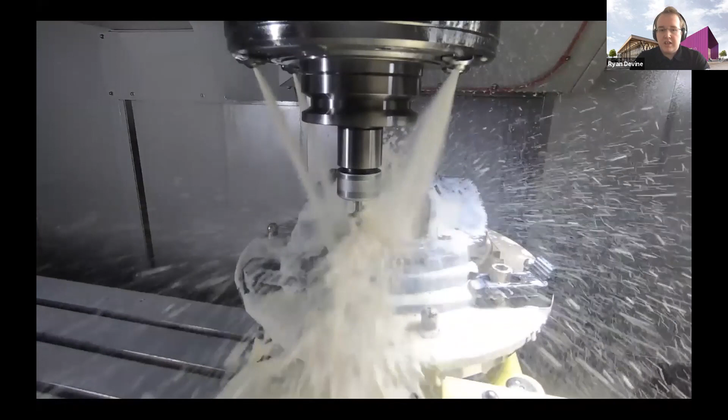Now we're undocking, ready to tool change over to a milling tool and start the machining process. This is us coming in to machine flash land 1 to its final geometry. And now finally machining the flat on cavity area 2 to its final geometry, ensuring that smooth blend between the 2 materials.

For the production trials at Mills Forging, they had a 1,000 ton hydraulic press, and would normally expect to see 1,300 parts out of a new die. Our die ran in the exact same production conditions that would normally happen, and this was carried out at their centre.

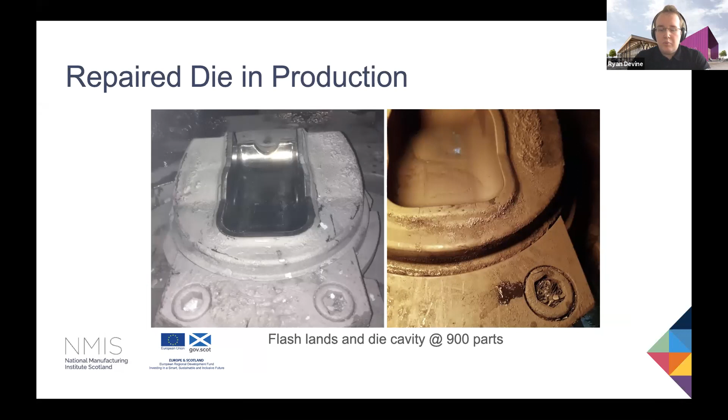These pictures were taken in their press after the die had produced about 900 parts. At this point, the dies were showing really very little wear on the MetcoClad 21 areas, and performance on them was going really well - it was really high performing at that point. This was really good for us to see, as quite far into what would be a production run, the dies were still performing really well.

Just for reference, a new die would normally produce 1300 parts. Our die went into service as normal, ran its 1300 parts, but then we were able to get an additional 1400 parts out of that die, for a total of 2700.

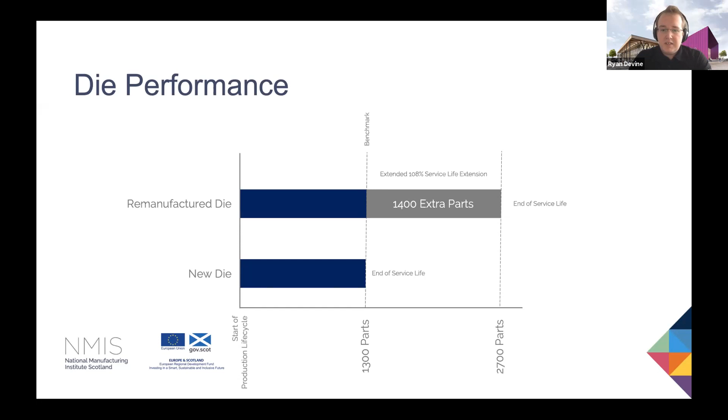This gave us a 108% increase in life. So with that, it obviously brings a good number of sustainability benefits and cost savings as well.

One of the other things we experienced was actually less wear on these MetcoClad 21 areas, which shows that the benefits could also be applied to a design for remanufacture, where you can do these key areas in this hybrid process to ensure that you get less wear on the die.

We also had no production issues reported by the customer whilst it was in service.

So just to sum up from the project, we were able to say that the LMD process is ideal for hot forging die remanufacture, particularly in this hybrid additive manufacturing platform where everything can be done in one machine, one process. There's the capability to work on complex geometries, and the die life improvements are really beneficial for the customer because they don't need to buy new dies after 1300 parts - they can extend that life to a total of 2700. It shows the potential for commercialization of this technology is really evident.

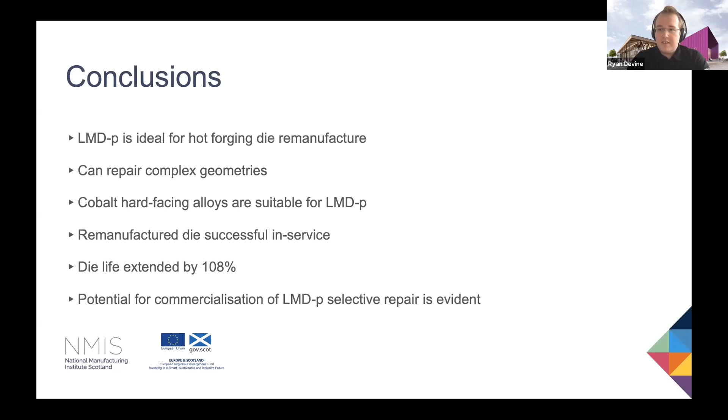So if you've got any questions, please feel free to get in touch with myself or the team. Thank you.

Thank you very much, Ryan. That was absolutely fantastic, really in depth as well, showing everybody the kind of benefits possible with this technology.